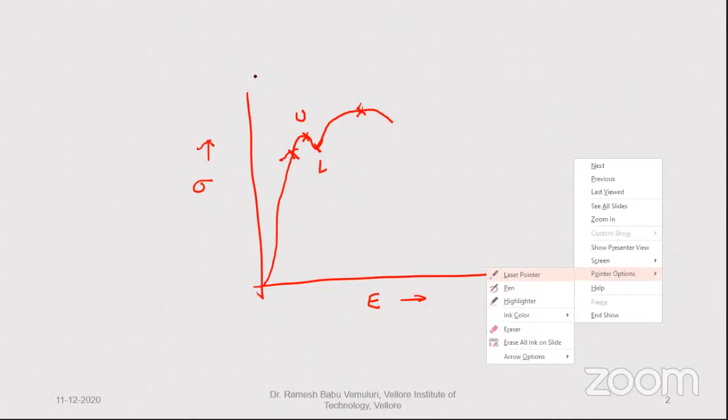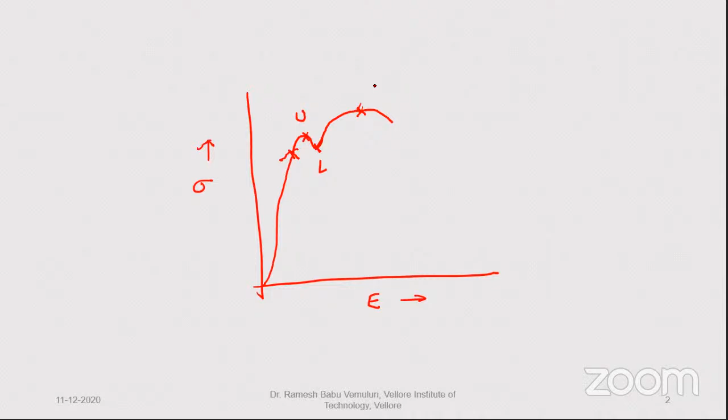So these are the various points as we know: the proportionality limit, then the upper yield point, then the lower yield point, and this is the ultimate tensile stress. So this point is the ultimate tensile stress, and this point is the breaking stress.

Breaking stress. Majorly, we know that from this point onwards we go to the elastic limit, then the elastoplastic stage, then the plastic stage. The components we deal with in design are mostly in the elastic stage, and sometimes go into the elastoplastic region. So this is the elastoplastic region, and this is the plastic region.

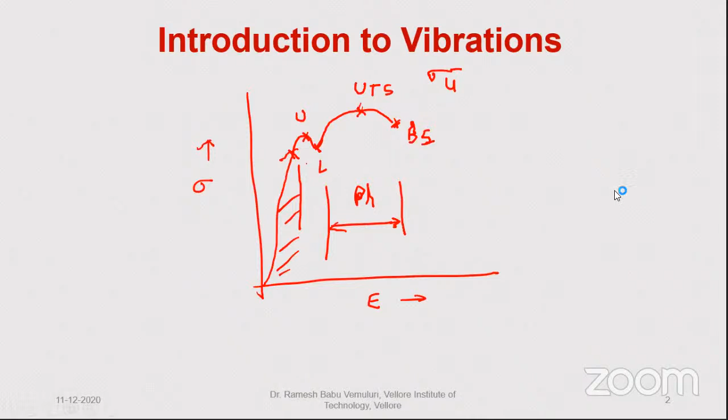A motion that repeats after an interval of time. So basically this is any motion. It could go both sides, or it could be in one side, and it could be a sine curve, square curve, triangular curve, or smooth curve. The motion which repeats, we'll call this a vibration.

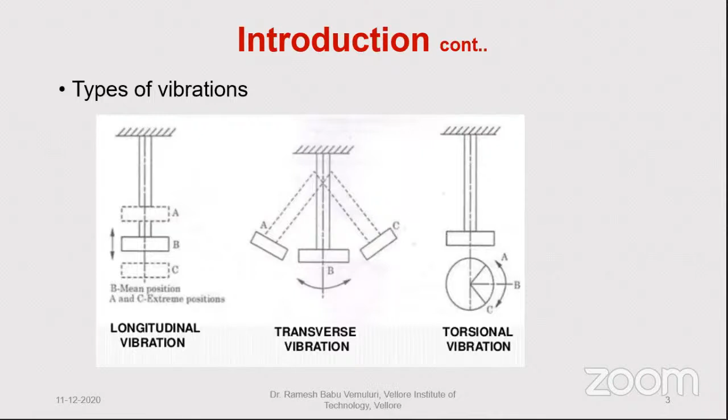There are various types of vibrations: longitudinal vibrations, transverse vibrations, torsional vibrations. Examples for this are a vibrating tuning fork, a weight on a spring, a buoy on a string. So these are three different examples of vibrations. Any body possessing mass and elasticity is capable of vibration. So this is the major thing we need to understand. Any member which possesses some mass and elasticity is capable of vibrations.

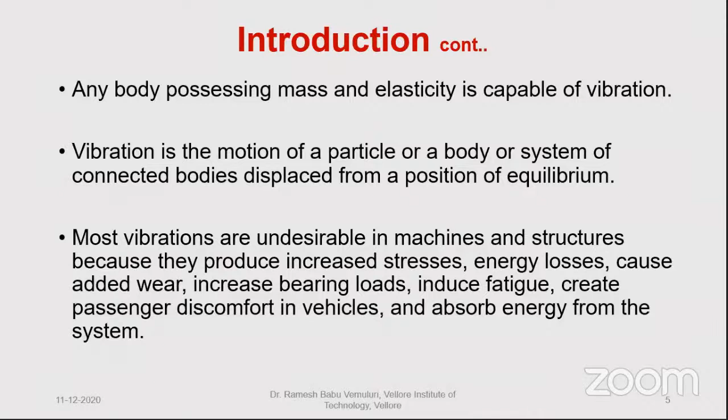If they are connected, then normally it should be in a position of equilibrium. And these vibrations are sometimes needed, and sometimes not. So what are these undesirable cases? It will increase the stresses, energy losses, cause added wear, and various losses. In the same way, it is needed in washing machines, mechanical shakers, sieves and other sorting devices, and musical instruments. The stress relieving technique of relatively recent origin makes use of the principle of vibration. So that is where vibrations are needed.

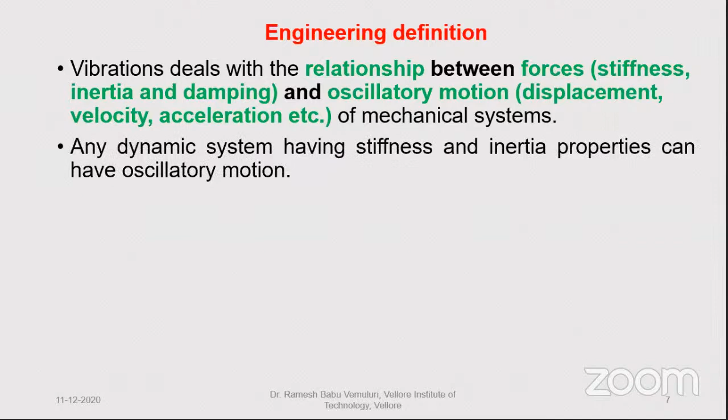From this perspective, I can say vibrations deal with the relation between forces like stiffness, inertia, and damping, and oscillatory motion, where the oscillatory motion is related to the displacement, velocity, and acceleration of mechanical systems. Any dynamic system having stiffness and inertia properties can have oscillatory motion. The oscillatory motion can be periodic or random.

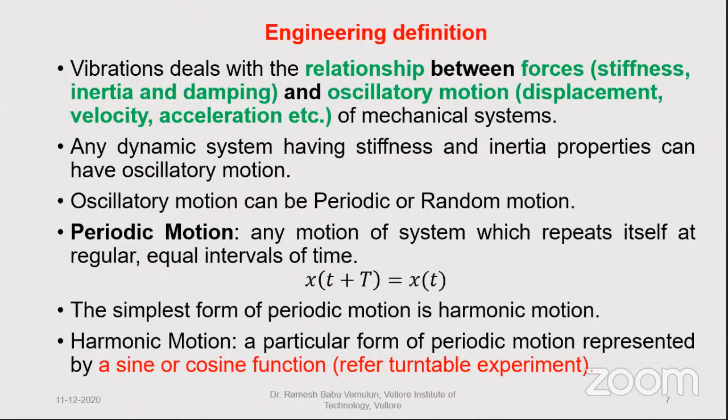The same way, the equation x = A sin ωt satisfies the two conditions, the period condition as well as the acceleration condition. Then obviously x = A e^(iωt) also satisfies both these conditions. So that's why we can represent these periodic motions in the form of a sine curve, exponential curve, and a cosine curve.

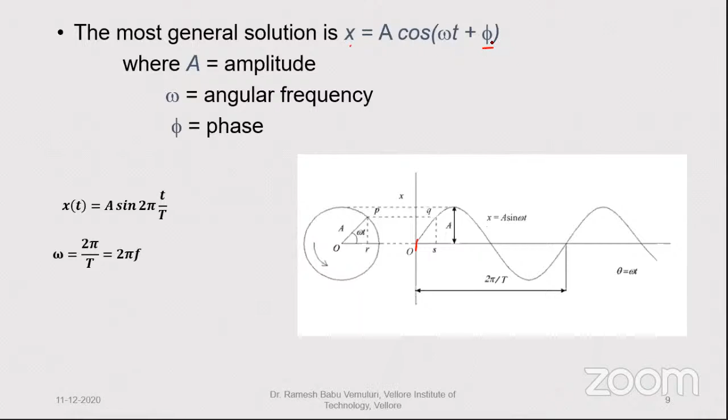So this phi is called a phase. That phase I will discuss in the next one. So once our point of reference and its displacement initiation, where x equals a cos omega t, the displacement initiation will be a cos 0 equal to 1. So there only a will be there, since cos will be 1. Then if both are the same, there is no need to add this phi, called the phase angle.

But here in this case, our point of observation starts from here, whereas the max amplitude, the initial condition, started just before this. So this is a phase angle; however much the angle difference is, that angle needs to be included. Only then can we properly estimate this displacement in mathematical terms. So this phi is called the phase lead, and then the phase lag, where our point of reference is here and its maximum is after that particular point. These are the phase differences.

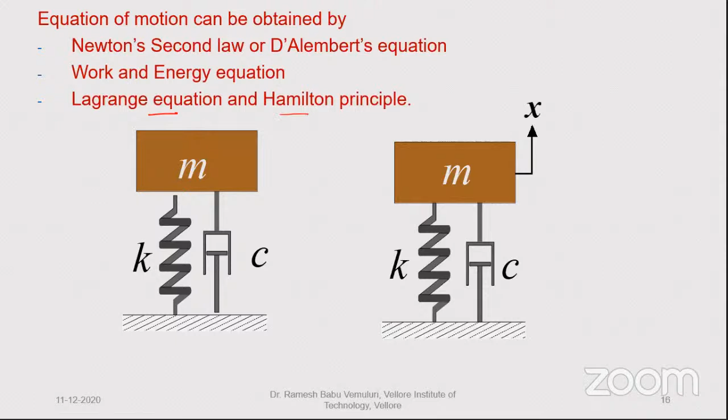Once we get these models, how do we solve the general equation of motion? By taking a free body diagram of these masses and K and C, using Newton's second law, or D'Alembert's principle, or the work energy method, or the virtual displacement method, and then the Lagrange equation and Hamilton's principle, we can solve these equations of motion.

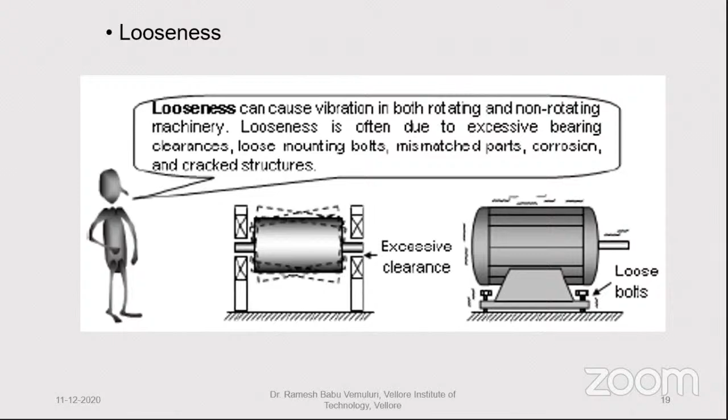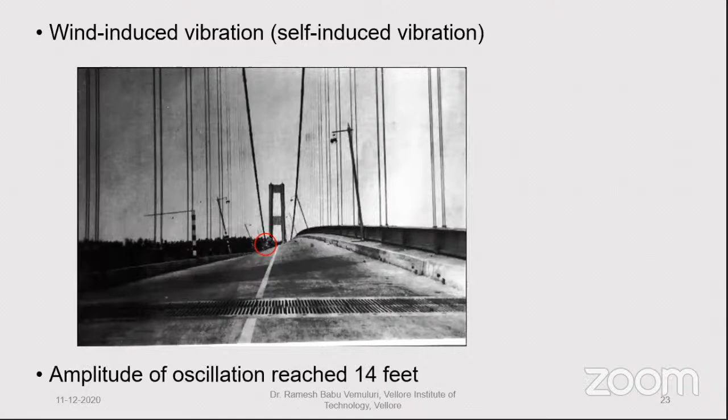In the perspective of these flows, this is one incident where the whole observation and analysis of vibrations changed. This is called the Tacoma Narrows Bridge, November 7, 1940, failing due to wind-induced vibrations. The amplitude of oscillation reached 14 feet. Then the joint failure initiated, and slowly the total structure collapsed. After this, scientists did a lot of analysis on the Tacoma Narrows Bridge, where they understood that once the amplitude reaches its maximum, failure can initiate.

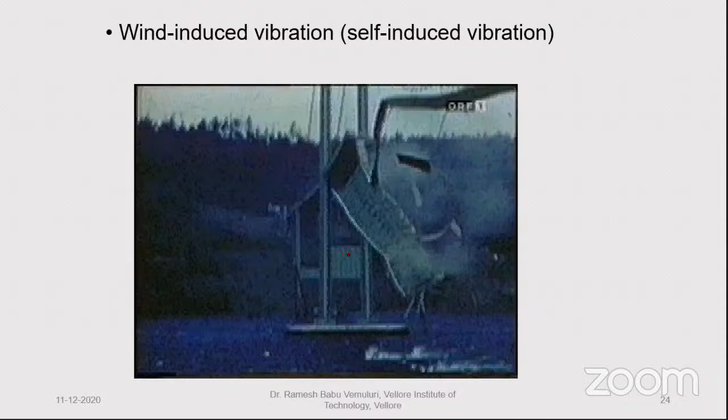So how can we stop this maximum amplitude, or how can we reduce it? That was their major focus. Then they introduced a term called damping. By using damping, we are able to reduce the maximum amplitudes. And even if it goes to the maximum or the resonance condition, if we have damping, the system or structure won't fail. That is the basic understanding made from the Tacoma Narrows Bridge failure.

So then, how can we go with high-speed rotating machines where it always crosses its natural frequency? Just one example: let us say a system has a natural frequency of some 100 radians per second, but we need to rotate it at 200, 300, 400 or 500. You know that once it reaches its resonance condition, large amplitudes will happen, and these amplitudes cause failure in the system. So how to stop this? By incorporating a damping mechanism into the system or material, we can run it below these maximum amplitudes, and the system won't fail. How these damping elements work and what the various damping elements are, we'll see later.

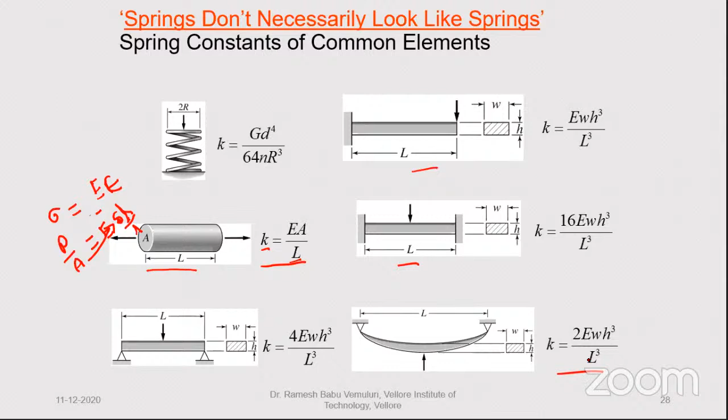So for various other systems, we have taken this stiffness. Many of you already know these points. I'm trying to correlate these aspects with the composite equation of motion, or deriving these equations of motion, so that you understand how to connect them. That's why I am going quicker, not deriving all the equations, as I am assuming everyone already knows these things. If you are unable to follow this, please let me know.

So damping elements - after the Tacoma Narrows bridge failure, the importance of the damping element was understood. In real life, systems do not vibrate forever. If they do, there should be something pumping energy into that system. This energy, initially associated with oscillatory motion, is gradually converted to heat or sound. This absorption is done by the damper, called the damping mechanism. There are three types of damping mechanisms: viscous damping, Coulomb or dry friction damping, and material or solid or hysteretic damping.

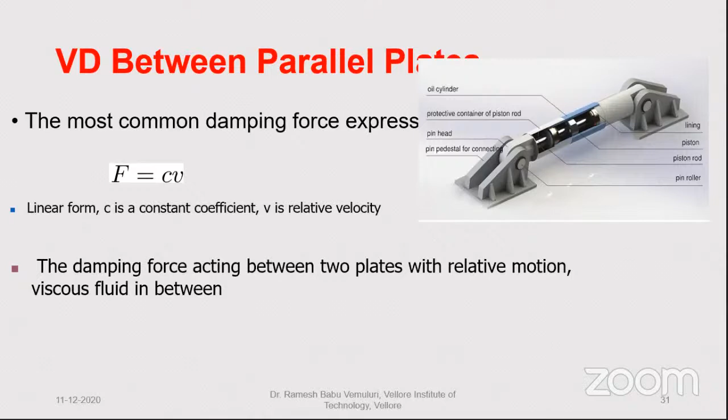Viscous damping is experienced by a system vibrating in a fluid medium such as air or oil. The resistance offered by the fluid to the moving body causes energy to be dissipated. The amount of energy dissipated depends on the fluid, as we know the viscous properties, with viscous fluids between two parallel plates. I'm not going to derive these equations again - the force is equal to CV. These equations from fluid mechanics you can refer to.

Newton's law of viscous flow. According to this, there is a constant called the damping coefficient, C, which is equal to mu A by H.

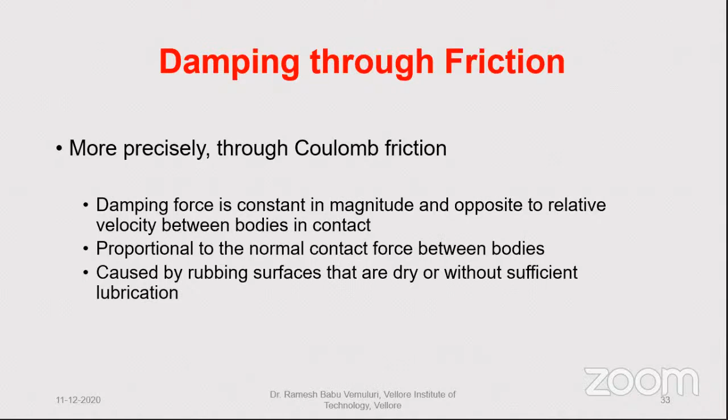Next one is called damping through friction. Here a damping force is constant in magnitude and opposite to the relative velocity between the bodies in contact. Majorly the rubbing of dry surfaces without sufficient lubrication generates this friction, and due to this friction its motion is lost, converted slowly into heat. So that way it is dissipating its motion in the form of heat by friction.

According to Newton's second law, the sum of all forces equals the effective force, which is m times x double dot. We consider this side as positive force and this one as negative: minus kx minus fn, which is mu n. The sign depends upon the direction of the frictional force. So this is how we can draw its free body diagram, and from the free body diagram, through Newton's second law, we get the equation of motion.

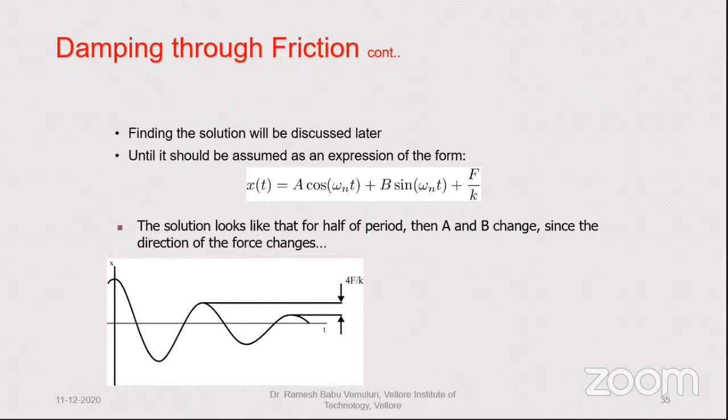So for damping through friction, finally we can get the displacement in the form of A cos omega nt plus B sin omega nt plus f by k, where f is this friction force.

The next one is material, or solid, or hysteretic damping. This is nothing but the material itself having a certain damping mechanism or property, called the energy absorbed and dissipated by the material itself. This is already seen in the stress-strain diagram, where...

Say I have applied a force this way and it is deformed, and now you try to release this force. Will it follow the same line? No, it will follow a different line, so there will be some strain energy. If I apply a load and release it, unloading, the material will absorb certain energy. This is nothing but hysteretic damping, also called solid damping of a material, and here it follows a loop called the hysteresis loop.

With these, the three major elements for vibration are mass, stiffness, and damping element. These three damping elements we have seen. Now we need to understand how many independent coordinates or states a system has, to uniquely specify that particular system or body.

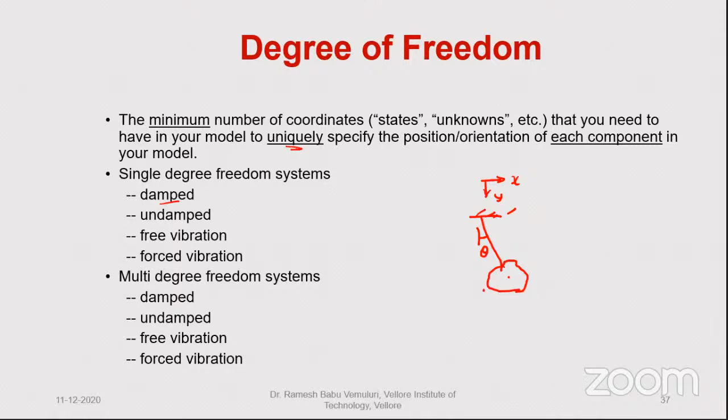So for each type called damped, undamped, free vibration, and forced vibration, we'll see how the equations of motion can be derived and solved. Then we'll see the same thing for composite structure cases. First we'll do single degree of freedom systems, where it is very easy to understand and people can follow very easily.

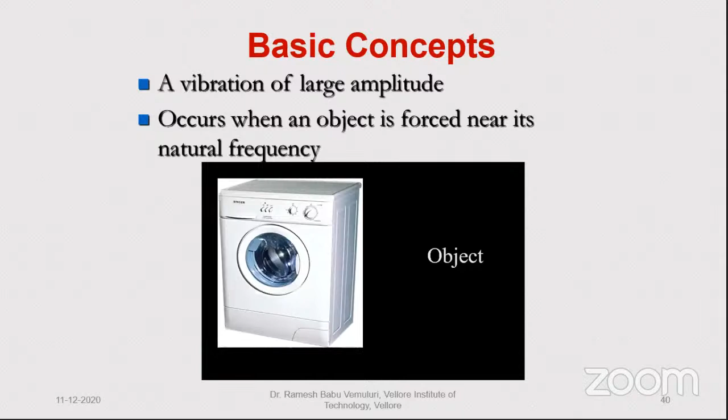Resonance, a vibration of large amplitude, occurs when the object is forced near its natural frequency. So this is one vibrating washing machine. We can model this in the form of K, M, C, where there is one mass oscillating. Maybe some clothes or something we keep here, and then it will oscillate and rotate inside this.

Then here we come to our major structural analysis. Here we need the mode shape, resonance, and natural frequencies. We have seen the resonance part, and when we'll get the resonance condition, what is mode shapes, and how these natural frequencies work, we'll see next.

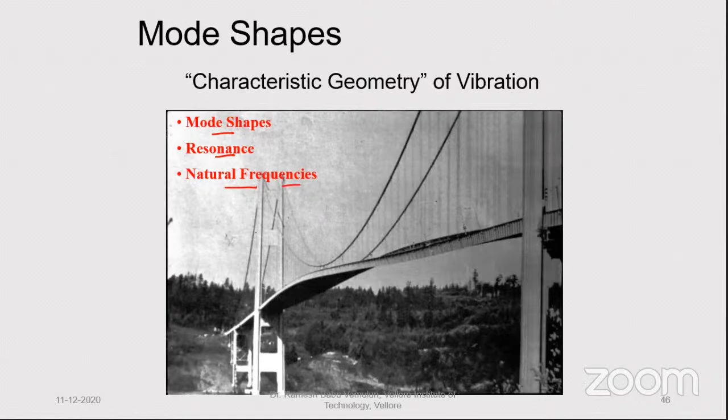These are the three characteristics we need, the characteristic geometry of a vibration. So for any vibration analysis procedure, as mathematical modeling, first we can convert that physical object into a vibration model, and then represent that in a mathematical form. That mathematical form is nothing but a governing differential equation, and by solving that governing differential equation we can interpret various results.

So these are the four steps to be followed for vibration analysis of any structure. How can these structures be broadly divided? They can be divided into discrete parameter systems and distributed parameter systems, or continuous parameter systems. Here, the number of degrees of freedom plays a very important role. If you are able to say what is its finite degrees of freedom, then obviously it is a discrete or lumped parameter system. Then for distributed parameter systems, if you are unable to define the system with one finite degree of freedom, we'll call this a distributed parameter system or continuous system.

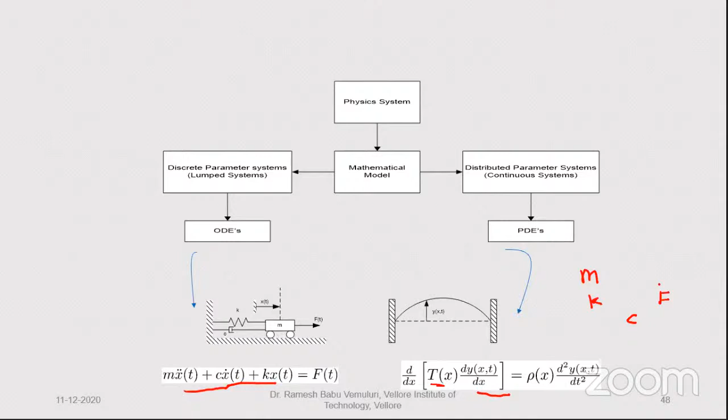Then how can we classify the type of these mathematical problems in vibration? The lumped systems lead to ordinary differential equations, continuous systems lead to partial differential equations. As we've already seen, these are more difficult to solve. The typical problems are not only ordinary, linear, but also non-linear.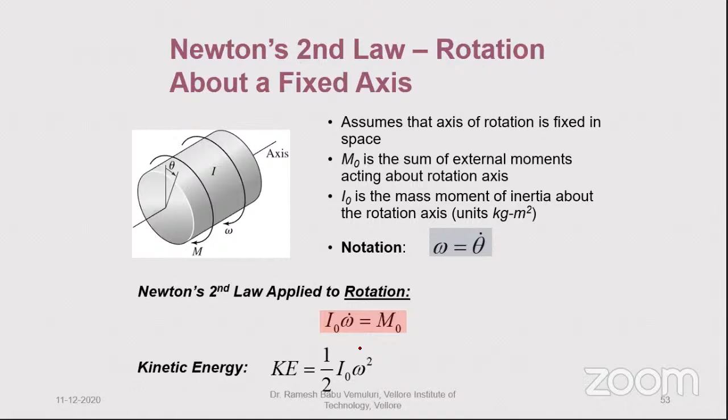Then this is the mass moment of inertia, and the parallel axis theorem and perpendicular axis theorem, we already know those. And general planar motion. So we'll get this equation of motion. And then the energy approach for the derivation of the equation of motion.

Whereas this Newton's second law method will be very useful for a simple single degree of freedom system, for multi-degree of freedom systems we can't go with this; we need to go with the energy equations only. According to the conservation of energy, total energy is constant. Then obviously the change in energy is equal to 0.

So from that, T2 minus T1 is equal to U1 minus U2. So obviously it will go like this: T1 plus U1 is equal to T2 plus U2, or the sum of energy is equal to a constant. For non-conservative systems we have... then the equation of motion for the spring mass system.

This is the simple equation, and how to find the natural frequency. If you know the stiffness and the mass of the element, irrespective of whether it is a lumped system or a continuous system, if you know K and M, obviously we can find the natural frequency.

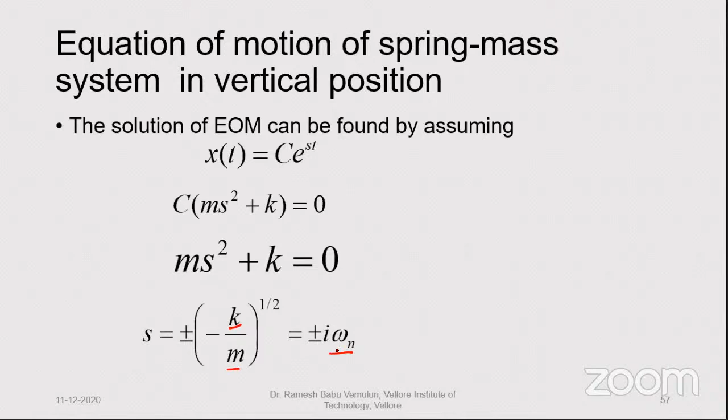So the general solution for this, and then the free vibration of undamped torsional systems, where we can get the natural frequency, which is equal to the square root of torsional stiffness by J, the polar moment of inertia. So there we got stiffness by mass, whereas in rotational terms we have the torsional stiffness and the polar moment of inertia.

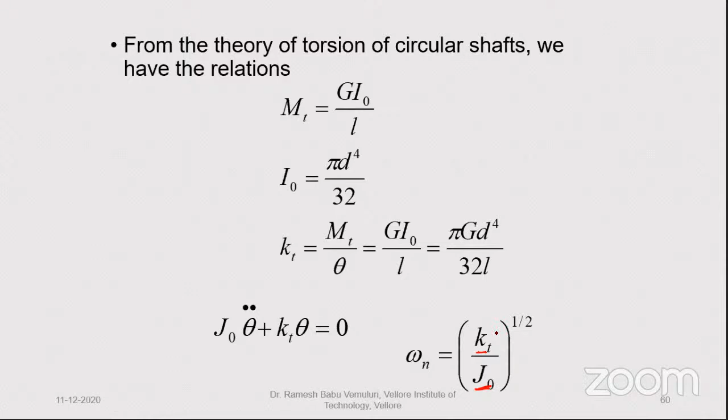And these are the natural time period and the frequency in hertz, and at the bottom are the solutions for this. Until now we have seen only the case without damping. Now let us say you have a damping term, c x dot; how to solve this one? x(t) is equal to C e power st. So m s square plus c s plus k is equal to 0.

In terms of the transfer function, we have represented the solution in this form, the Laplace transformation case, with the roots s 1,2. Here itself we could divert this equation of motion to a control system perspective, but we are not going to discuss that perspective. We are simply solving the equations here, with roots s 1,2, and we can get the solution in this form.

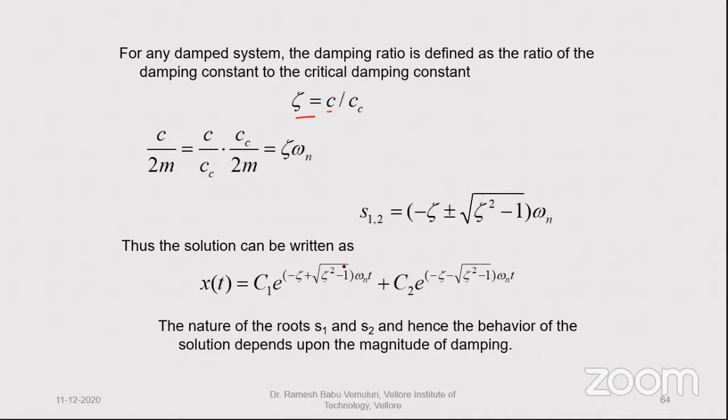And x(t). I am not going through these derivations, as we already know them. So this is nothing but the critical damping coefficient, which is equal to 2m omega n. Then zeta is the damping ratio, which is equal to C by Cc, the damping coefficient by the critical damping coefficient.

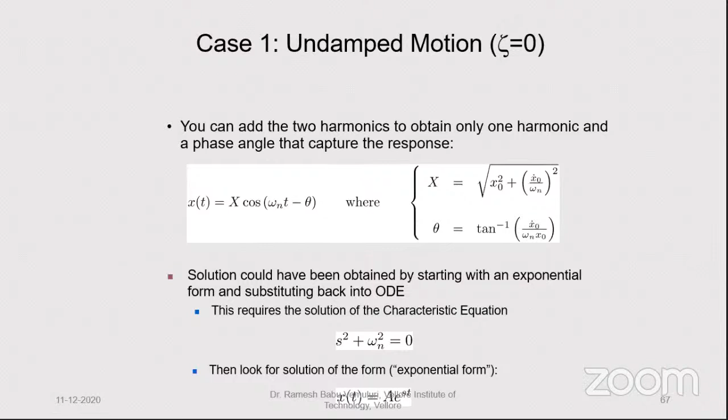After the solution, there is a motion taxonomy: zeta equal to 0 is called undamped, greater than 1 is called the overdamped case, equal to 1 is critically damped, and less than 1 is the underdamped case. For the undamped case we get the solution x(t) equal to A e power st.

Then damped motion, where we have cases called underdamped, overdamped and critical damping. The overdamped case is zeta greater than 1. It's called supercritical, where aperiodic motion will be there. No repeated motion will occur: if you give some displacement to it, it will come to its original position very quickly and it won't travel in the opposite direction.

So that is the overdamped or the supercritical case. Shock absorbers and whatever we are using for door applications normally use the overdamped case. Then the critically damped case, where it will take some time to come to its original position, but as well here we can understand it won't repeat.

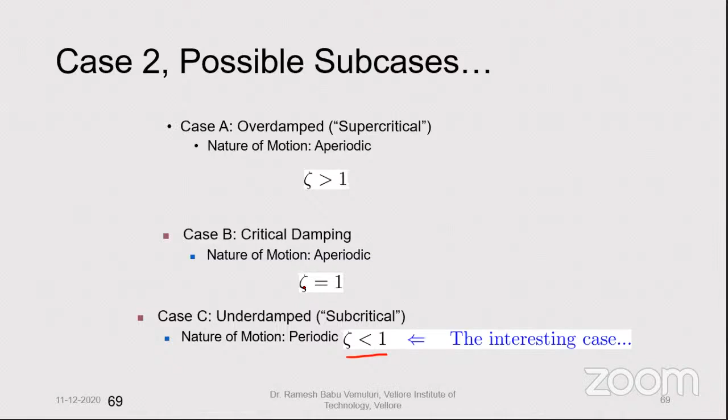And here is the underdamped case, where zeta is less than 1. It is also called the subcritical case. So here oscillatory motions will occur. That's why it's called periodic motion here, whereas the critically damped and overdamped cases are aperiodic. So the periodic case is the underdamped case, whereas with the overdamped case, these are the various applications. Door closers and all we'll use here. These are the overdamped case.

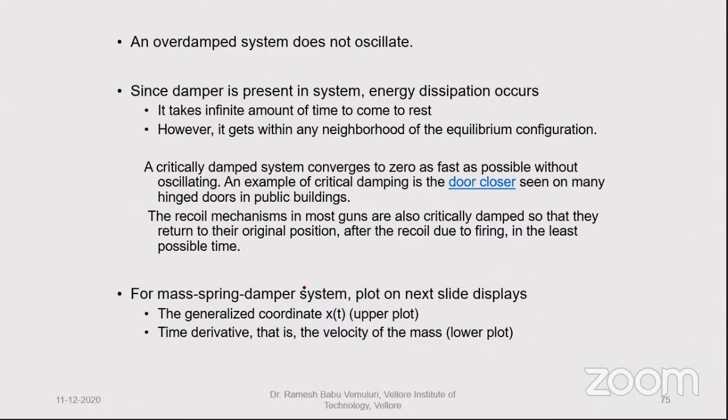Then zeta equal to 1 is the critical damping case. So if you use a critical damping case, let us say its C term is reduced, then obviously it will go to the underdamped case. So that's why normally we won't prefer the critical damping case. We'll always go for an overdamped case. The critical damping case will take some more time. So this is where

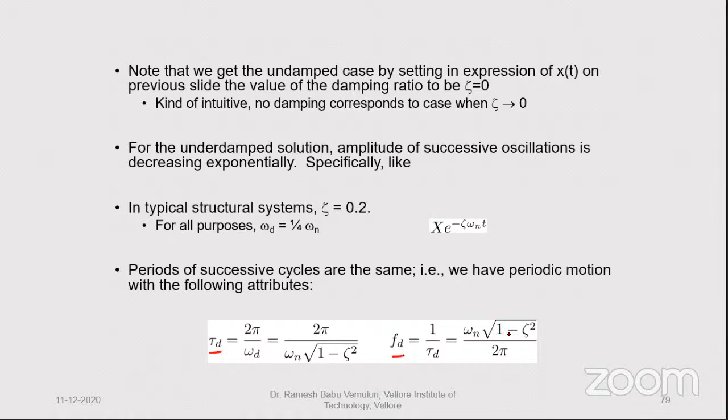the underdamped case, zeta less than 1, where how much damping we can apply here, and the damped frequency, the natural frequency, these relations. Then the damped time period, damped frequencies in terms of hertz, so these are the underdamped example case, and then the graphical representation of the system response in the underdamped case.

Then this is the logarithmic decrement. Again, I'm not going into the derivations of this one. The major purpose of the logarithmic decrement is how much the amplitude of vibration is reducing from one cycle to another cycle, and how this term is related with zeta. So this is the major important aspect here. Once zeta changes, obviously the logarithmic decrement, that means how much the amplitude of vibration is reducing for each cycle, will also vary. So zeta is equal to delta by 2 pi.

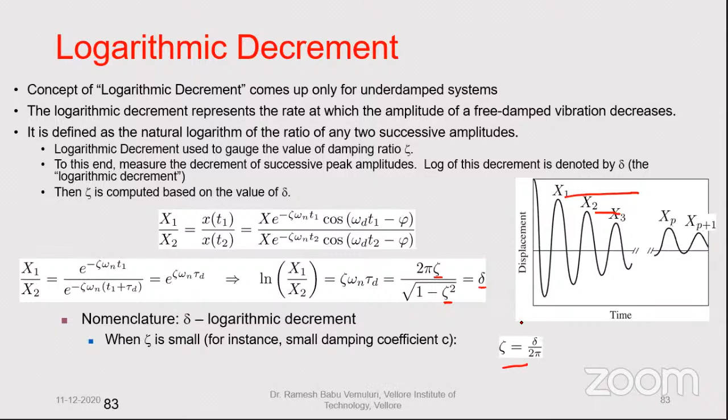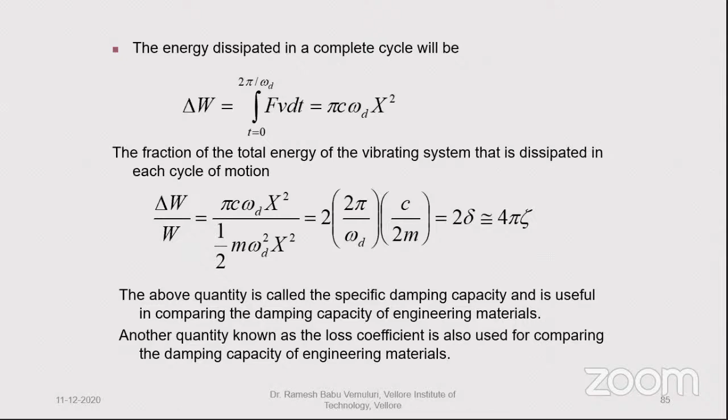Then energy dissipation we discuss. Once we take the case of viscous damping, most of the cases will take viscous damping only, because it is more efficient when compared with dry damping, friction damping and material damping. So then total energy in the damping term, energy dissipated. So this is the loss coefficient. Also called the loss factor, energy dissipated. How much energy is dissipated? So natural frequency and the energy dissipated, how much loss coefficient is there? These are the two major factors which decide how structurally stable a particular system or model is.

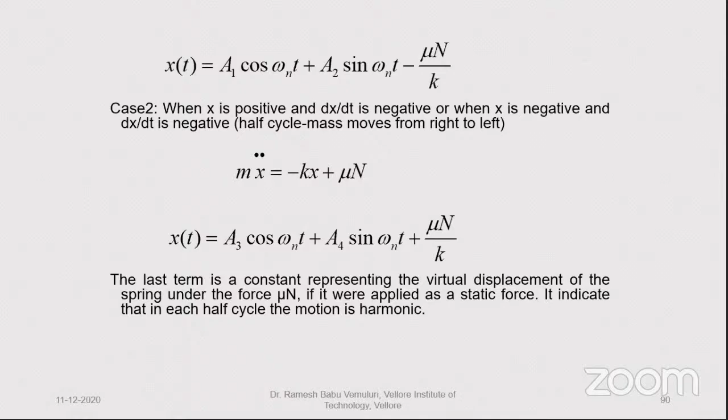Then torsional systems with viscous damping. This is one example, because previously we have seen linear vibrations, now we have seen torsional vibration. Then free vibration with Coulomb damping, its equations of motion. Because we have seen viscous damping, now by using Coulomb damping, how it will reduce. Then the torsional system with Coulomb damping. For Coulomb damping only the final equations are given.

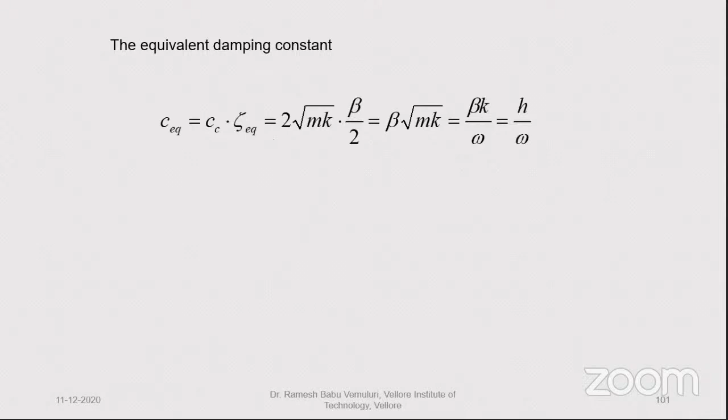Then free vibration with hysteresis damping, how this is related in the hysteresis case. And the complex stiffness. Then again, damping ratio and the logarithmic decrement, and this equivalent damping constant. So with this, the free vibration,

free vibration is a vibration where the force is applied only at the initial time, and after that it is removed; that is called free vibration. In forced vibration, the forces are applied after repeated intervals of time. Normally the magnitude or amplitude of this force will be constant, and the time will be different. How it behaves will vary: cos means at the initial observation time it is at the maximum peak; if it starts at 0, then sine, or for the mathematical equivalent you can take e power i omega t. So here there is no phase. Whatever our observation, the maximum or minimum displacements are the same here.

So here it is subject to a force, and this force is a harmonic force. Then m x double dot plus c x dot plus k x is equal to F sin omega t, and this is the displacement term. Then the dynamic load factor, also called the amplification factor, is the amplitude of the forced vibration by the static deflection. These are the solution cases where we got the two solutions, then the zeta ratio.

So this is a very interesting observation, where we can see here the natural frequency is equal to the forced frequency. It is our resonance condition. In the resonance condition, we can observe these amplitude ratios. This is the static deflection, and this is the deflection. When compared to the static deflection, x is very much high. So you can observe here, this area is near to the natural frequency, where we can observe the amplitudes are increasing like anything.

So if you are not reducing these amplitudes, then obviously the system will fail. So here you can observe there is a failure. That's what happened in the Tacoma Narrows bridge case. So even nearer to the natural frequency, it need not go to the very exact natural frequency. Then by applying a damping term or a damper, we are able to reduce its amplitude much lower.

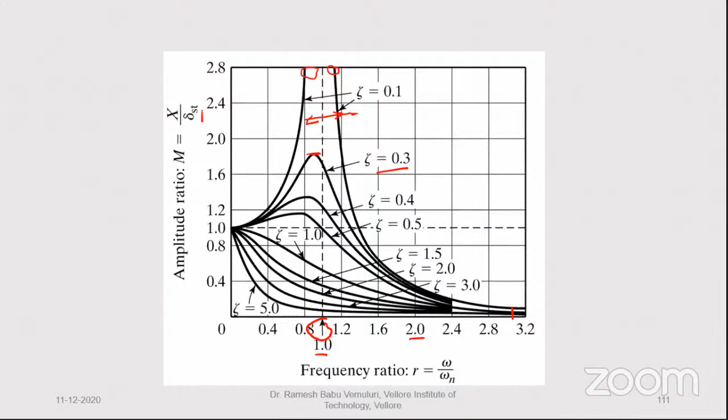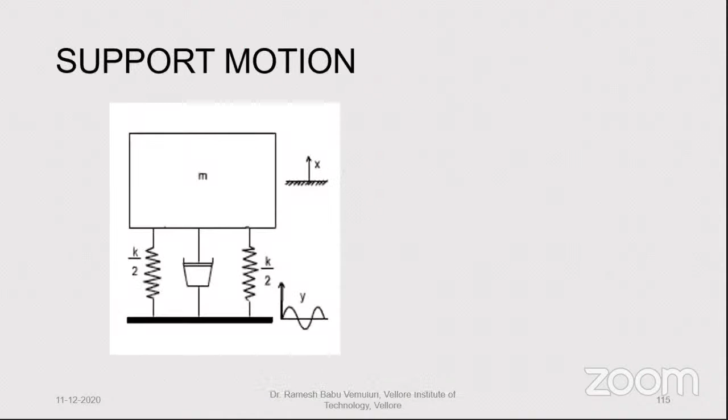Force transmission. So here at root 2, we can make this force transmission the same. At greater than root 2, obviously the force transmission will be very, very small. So while designing, we should take these points into consideration. Then support motion: the member of the system is moving as well as the support is also moving. In this case, how does the relation go? So here again, root 2 is the major case.

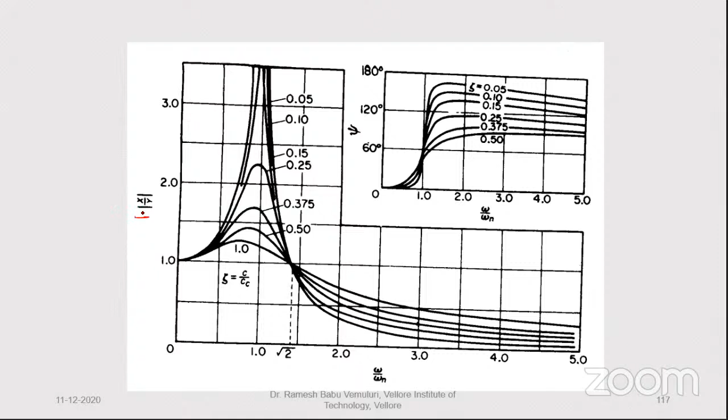Ratios and then the displacement ratios. Then the rotating unbalance. So if you have some unbalanced masses, the washing machine case we already saw. In this case also we can observe that with damping we are able to reduce its oscillations. So this way we are able to. So this is the rotor unbalance.

Okay, before going on, just to summarize here. Now we have seen a vibrating member, what its motion is, and how the vibration can be characterized by converting it into a vibration model with mass, stiffness, and damping terms, what the importance of the damper is and what the importance of amplitudes is. So once we know the importance of amplitude, then obviously we can understand the importance of the damper.

With damping, how the equation of motion is going to change, and what various equations of motion it can bring. And here, there are 4 different cases normally possible, for a system having stiffness and damping terms and subject to a harmonic force. What design criteria should be there from a vibration analysis perspective.

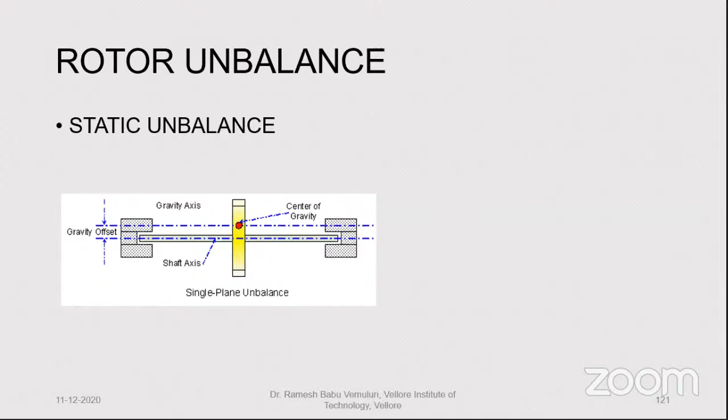How to solve that, I will discuss in the next cases. This is the rotor unbalance: the static unbalance case, where the unbalance is in only one plane. Then there is dynamic unbalance, where there is a 2-plane unbalance. Then whirling of the rotating shaft. There are various reasons for whirling: eccentricity of mass, hysteresis damping in the shaft, fluid friction in the bearing, viscous damping.

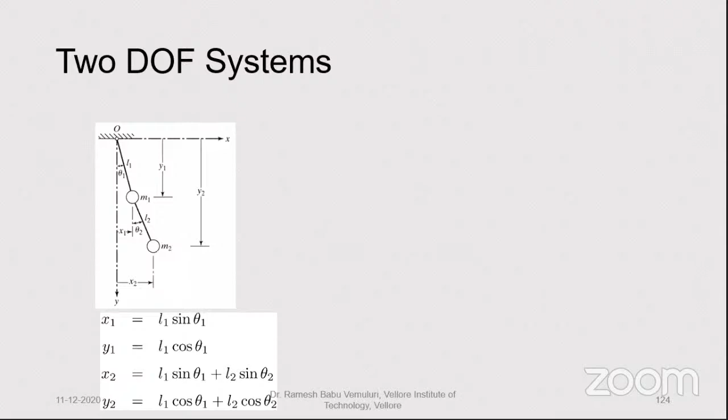This whirling of the rotating shaft we can observe in a laboratory experiment. You can see the first natural frequency mode shapes, the first mode shape and second mode shape. Then the 2 degree of freedom system, where we have taken a double pendulum. Here theta 1 and theta 2 are the 2 degrees of freedom, where x1, y1 are the dependent coordinates.

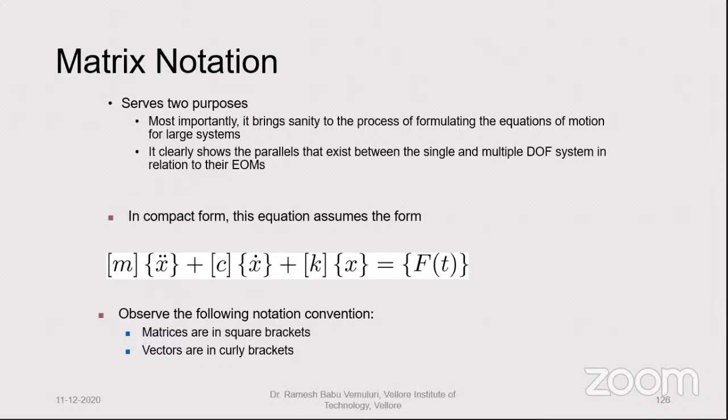The same way we can take these masses and get the equation of motion. Then this equation of motion, m x double dot plus c x dot plus k x, we can represent in matrix form. That's what we need to understand here: square brackets for matrices and curly brackets for vectors. Then various nomenclatures. I am not going in detail into how to derive these equations. Displacement vectors, force vectors. Then a final remark on the matrix notation.

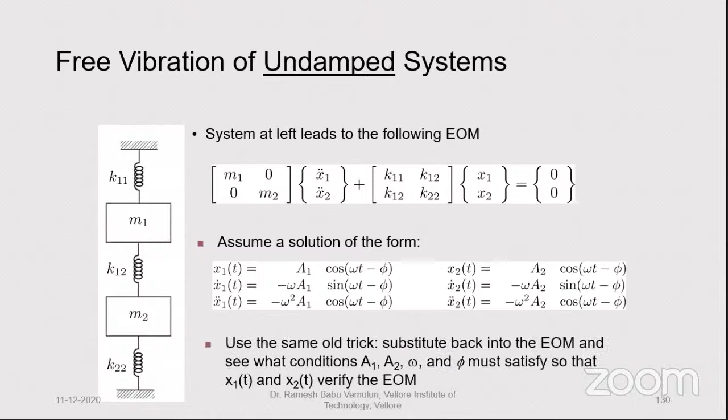Here, how to solve this in the matrix perspective, where the matrix A is singular. Then the free undamped system, where F will be 0. By taking this free undamped system, we can find the natural frequencies from its determinant. Then the solution for the natural frequencies will be this one.

These are the 2 natural frequencies, because this is a 2 degree of freedom system. Of the plus or minus, the minus will give the smaller one; that's why it is called omega n squared 1, and the plus will be the second natural frequency. These are the 2 natural frequencies we get from here.

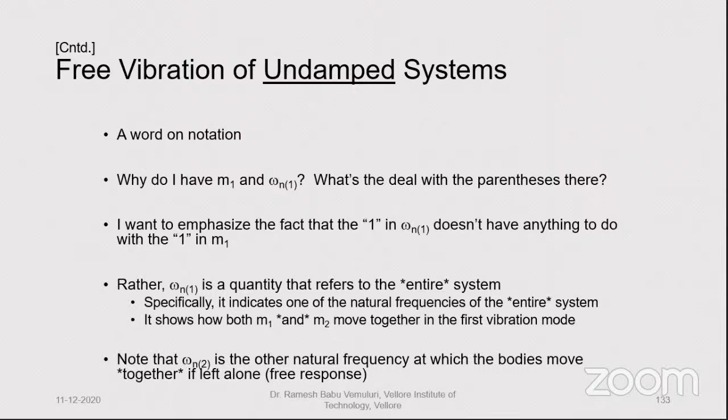Then with these natural frequencies, we can take the ratio of the amplitudes at a particular natural frequency. Then we get the eigenvectors with R1 and R2: by substituting one we get 1, and by substituting the other we get R values. These vectors are the modal vector or eigenvector 1, then for the second natural frequency, eigenvector 2.

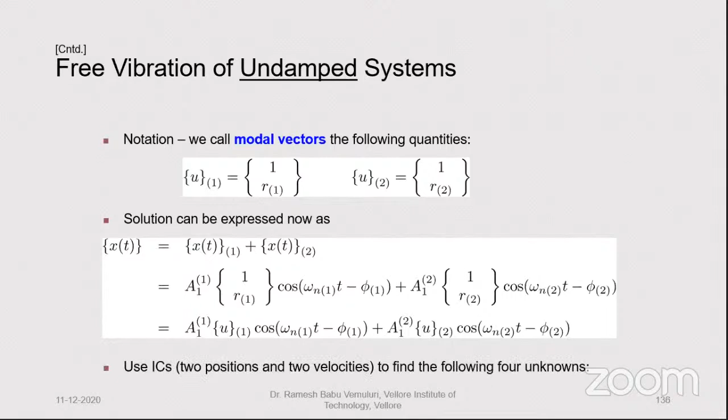So the solutions can be expressed in this form. Then initial conditions. By solving this, we can get the angles as well as the vectors. If you draw these in a particular shape, that is called the mode shapes.

So the solution can be expressed in matrix-vector notation. These displacements we can represent in this vector form, as well as the time function. So this is one example. This is a self example. You can take this as one example and you can solve it.

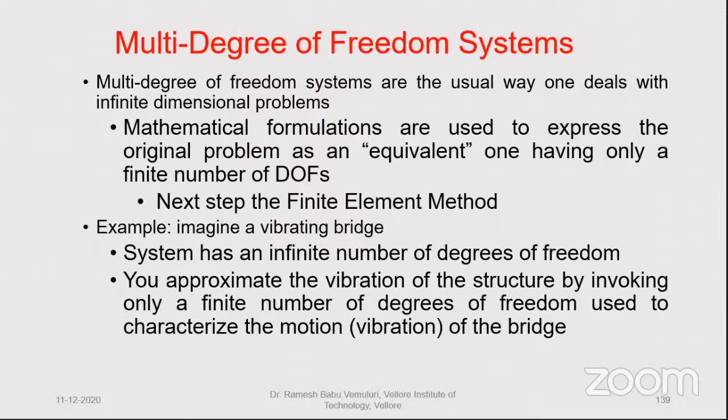And next one is the multi-degree of freedom system. Before, we have seen the 2 degree of freedom system, where we can solve these individual equations very easily, whereas to solve these multi-degree of freedom systems we need some finite element formulation methods, where we use the influence coefficient. The influence coefficient is nothing but the reciprocal of the stiffness, the flexibility influence coefficient, to solve multi-degree of freedom systems with more than 2.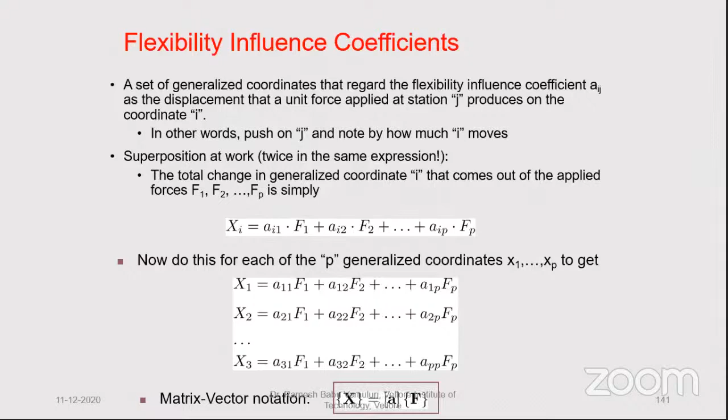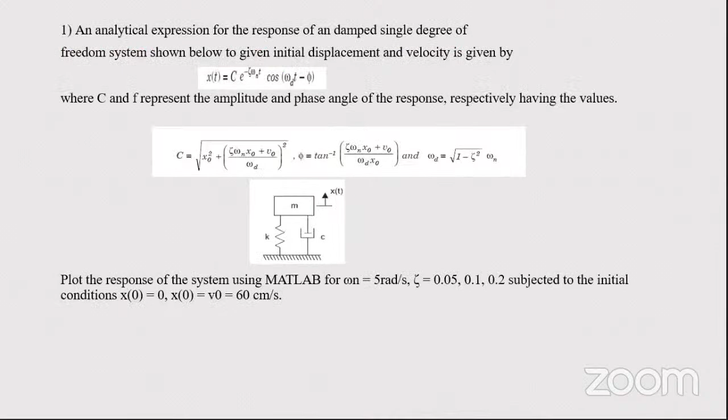Stiffness influence coefficient, you take this as an example case and you can solve it. And this is the stiffness influence coefficient. So these are the ways how to solve the multi-degree of freedom system problems. And this is the final flexibility and stiffness coefficients. Then this one MATLAB question we'll solve in the afternoon session.

Now we have seen the vibration perspective for the system with a single degree of freedom or multi-degree of freedom, and how, let us say, this member is failing, what are the various theories applicable. That's what the failure theories are. I will combine that concept with this now. The vibrations in the design perspective, types of loads or stresses, the theories of failure, normal stresses as you already know, then shear stress.

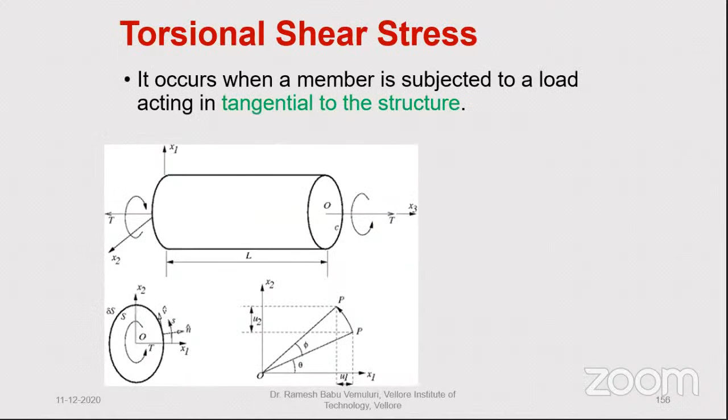So any member can be subjected to only 4 different types of stresses: normal stress, shear stress, bending stress, and torsional shear stress. So this is one element subjected to the forces, and this is about one plane. Then principal stress, how to calculate this principal stress, and this is how, by using Mohr's circle method, we find the maximum principal stress, minimum principal stress, and the maximum shear stress.

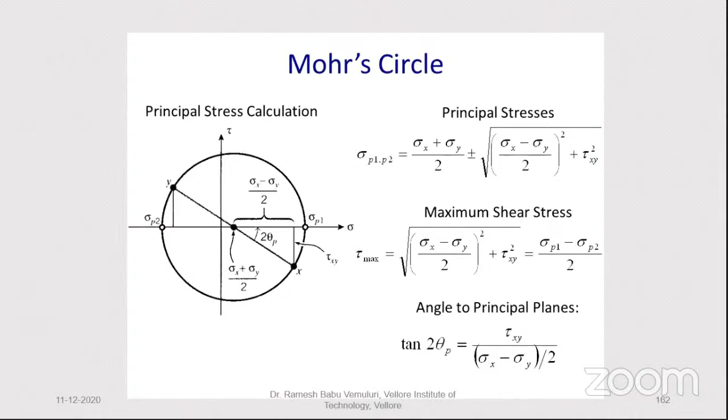And the various theories of failure, majorly 2 groups. One is elastic failure and the other yield failure. Excessive elastic deformation is called elastic failure, and yield failure is excessive plastic deformation. These are the various examples, and then the modes of failure: elastic deformation, general yielding, and fracture.

Then these are the 5 different theories of failure: the maximum principal stress theory or Rankine's theory, maximum shear stress theory or the Coulomb's or Tresca's theory, maximum strain theory, also called Saint-Venant's theory, Huber-von Mises-Hencky theory, and the maximum strain energy theory, also called Haigh's theory.

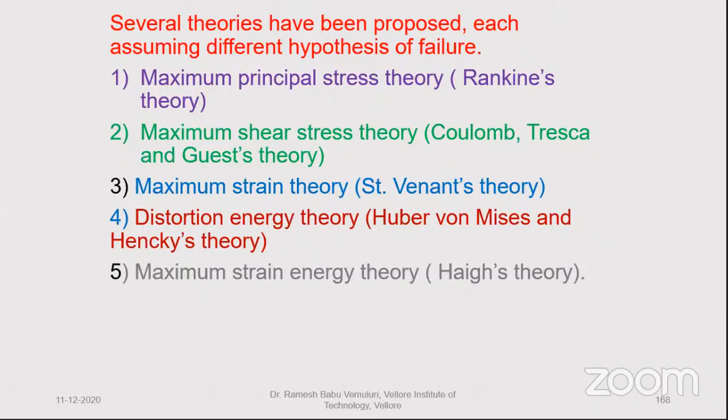From the failing factors perspective, on the stress side there is the principal or normal stress theory and shear stress theory, whereas on the strain side there is the principal strain, maximum strain energy theory, and the shear strain energy theory. So till now these are the basic things we already read. I took only the gist needed for solving the composite problems, from the composite and smart perspective also.

So now we'll come to the main topic called the 3D elastic element. In this 3D elastic element, as you know, sigma x is nothing but tau xx, then tau xy. X indicates the plane and y indicates the direction. So you can observe tau x: it is the plane perpendicular to the x-axis. Y is the direction, you can see here, and this is the z direction. So tau xy and tau xz.

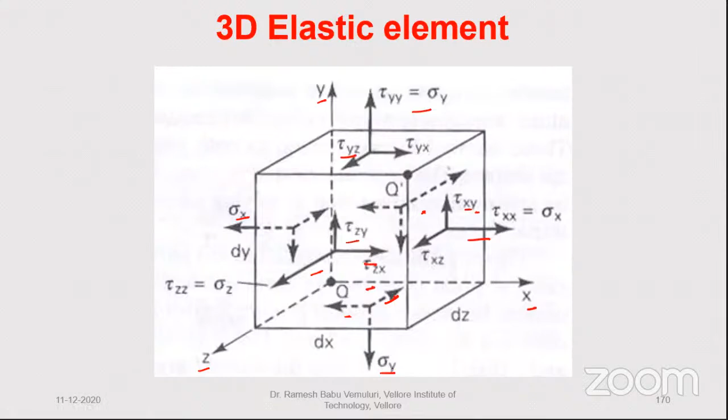So once it is in the static equilibrium condition, by applying this conservation of linear momentum, we can write these sigma and rho g equations. So these are the 3 static equilibrium equations by the conservation of linear momentum.

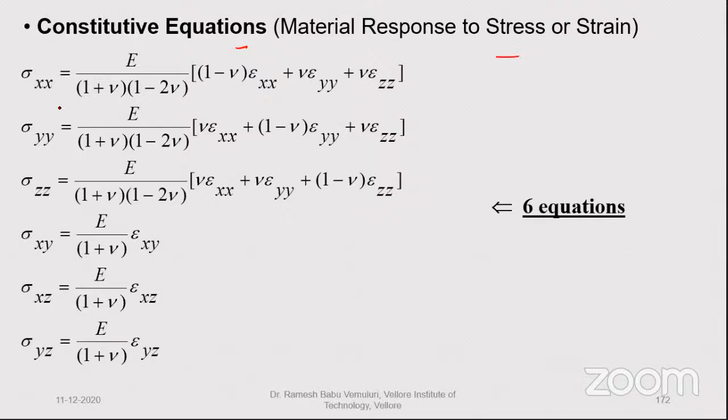Then the second one is the constitutive equation, by the material response to the stress or strain. So in this perspective, we have 6 constitutive equations, or alternatively the strain stress equation.

Then the third one is the geometric relations, or the kinematics for a small strain. For a small strain, we have these geometric relations, kinematics for the small strain. These are 6 equations again.

So the total for a 3D element, there are 15 equations: 3 equilibrium equations by linear momentum, 6 constitutive equations, either stress strain or strain stress, and 6 kinematic strain equations, which are the strain as a function of displacement gradients. So 15 unknown variable stresses are there.

This will vary according to the material, as already discussed in the composite context over these few days, with anisotropic material, isotropic material, orthotropic material, and transversely isotropic materials. So according to that, anisotropic material will have all the terms, whereas for isotropic material, some terms will drop out. This way, the total 15 governing equations can be solved based on a particular assumption or material behavior. This is a broader perspective I'm telling.

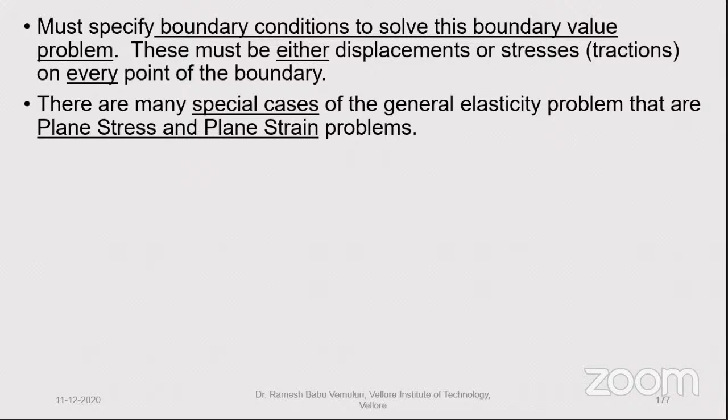Then we'll take the particular cases. We need boundary conditions to solve these boundary value problems. Here we'll take special cases called the plane stress and plane strain case.

First we'll take the plane stress condition, where if a member is thin, we can take this plane stress condition, where in the z direction, sigma zz, sigma xz, sigma yz terms will be 0. Then the stress tensor reduces to sigma x, sigma xy, sigma xy, sigma y. So these are sigma x, sigma xy. Then for the z term, as it is very thin, there is no z term.

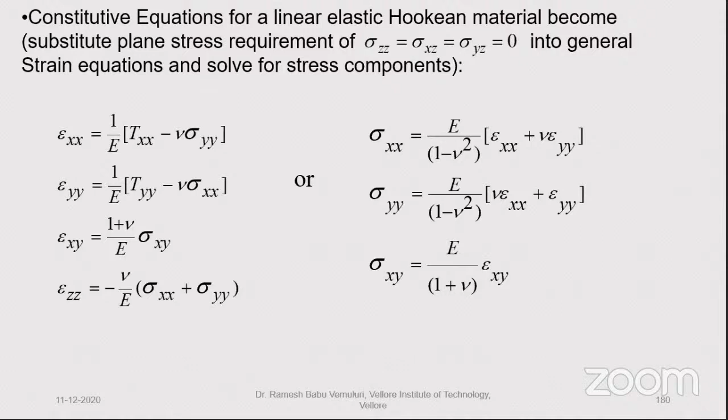Then this becomes 2D. Now how do these 15 equations become? The static equilibrium equations become only 2. Then constitutive equations become only 3. Then strain displacement equations become 3 again, and then there will be compatibility equations. So this way, the plane stress condition is formed.

And laminated composites. Now we'll come to the composites. These are the laminated composite, with a reference plane, and there are various numbers of laminas.

We can observe here, once it gets deformed in the z, x, and y directions, Rx is nothing but 1 by Kx, where Kx is the curvature, and 1 by Ky is nothing but the radius of curvature Ry. These are the undeformed reference planes, and these are the deformed cases in the x-y plane and the xy plane. Here we can see the deformed reference plane FD, and the total Kxy will become like this, whereas here Kx, Ky are equal to 0.

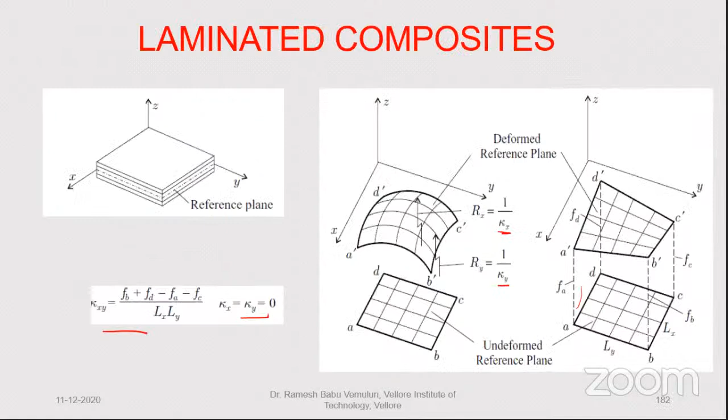So let us say this is theta, and this is r. So what is this, z or something, whatever it may be. So we can take this is equal to the...

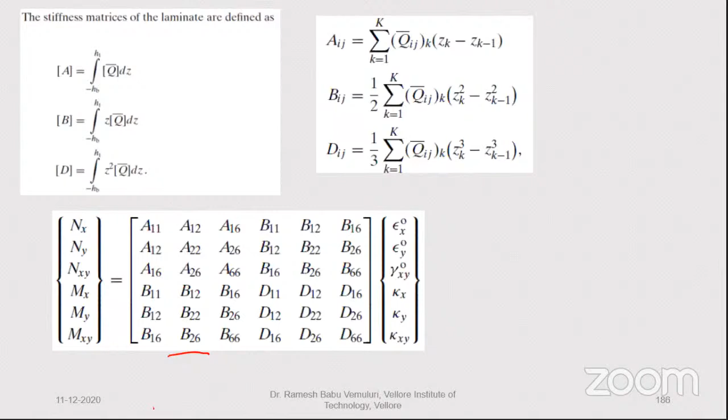So then, by simply representing these in terms of forces, moments, stresses, strains and displacements, we can't solve these. We need to solve by taking the energy formulation, where from this energy we can get the stiffness and mass matrices. Those stiffness and mass matrices, we can take the ratio and find the natural frequency. First we'll take the strain energy.

Strain energy U is equal to half integration, so then we can represent in this manner, and this is the kinetic energy. From the kinetic energy we can get the mass. From here we can get the stiffness.

So from here, this strain energy gives us the stiffness matrix. From the kinetic energy we can get the mass matrix, and the natural frequency, which is equal to the root of stiffness by mass. So in this way, for any composite structure - either the beam case, the plate case, membrane cases or shell cases - we can find the natural frequency. So for finding these displacements, it's all related to the theory you have considered.

So here it is the classical laminated plate theory, CLPT. That's why only one strain will be there, but in the first order shear deformation theory, those terms will increase, and if you take a higher order shear deformation theory, some more terms will be there. But the basic flow will be the same.